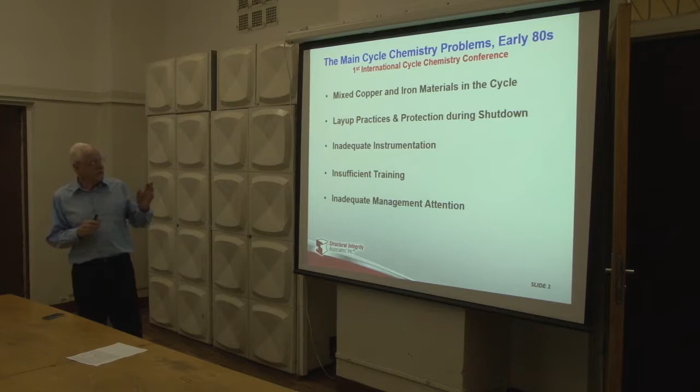If we think about the situation 30 years ago, in the early 80s, I conducted many surveys of a large number of power plants all over the world. These were the main cycle chemistry problems that existed at that time. The first one involves the use of both copper alloys and carbon steel or iron-based materials. It was very difficult to have those in the same power plant and get some success. So this was a major item.

30-something years ago, there was how we stored the equipment, how we shut the equipment down and protected it when it was shut down, and you'll see today that's still a very important aspect. The instrumentation on the power plant to identify conductivity, sodium, pH, or whatever, was also deficient. There wasn't enough training of staff, and there was inadequate management attention.

So when you go to the power plant, you're going to be a little chemist in the power plant, and there's going to be a big manager. You've got to be able to convince that big manager that chemistry is the most important thing in the plant. And I can tell you right now, it's impossible for you to do unless you have a management process in place that involves that plant manager. The plant manager is just as important as the chemist in the plant. So these were the items we found 30 years ago were the most important from a cycle chemistry point of view.

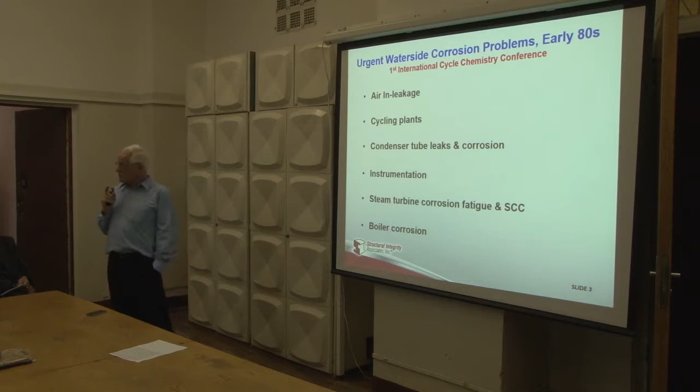And if you look at the corrosion problems that were in those power plants at the same time in the early 1980s: air in-leakage into the cycle, meaning air that comes in, not only oxygen but CO2, into the condensate part of the plant, through the condenser or the steam turbine. The plants at this time were just starting to cycle, or to be needed every day and shut down every night, so they were cycling. Condenser tube leaks and the corrosion associated with them.

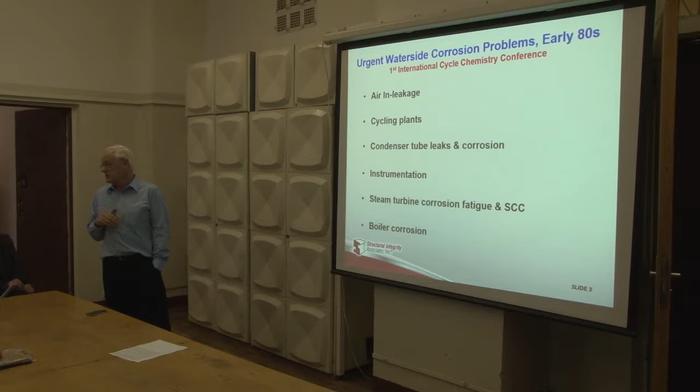Instrumentation again, a steam turbine, corrosion fatigue and stress corrosion cracking - these were the biggest problems in the steam turbine at that time. And then the various boiler corrosion mechanisms. So you can see this is where we were 30 years ago. We had to move forward from these situations to try to do the research to understand what was needed so that we could hopefully improve the reliability of the plants.

At the same time, there were many sets of guidelines in existence, and there was no international consensus. I just chose here four particular sets of guidelines, and I don't know whether you go into this in the classes you have here, but these were the four main guidelines that existed in the world 30 years ago.

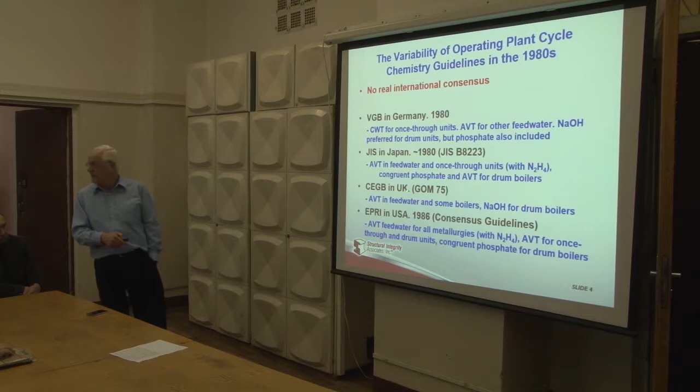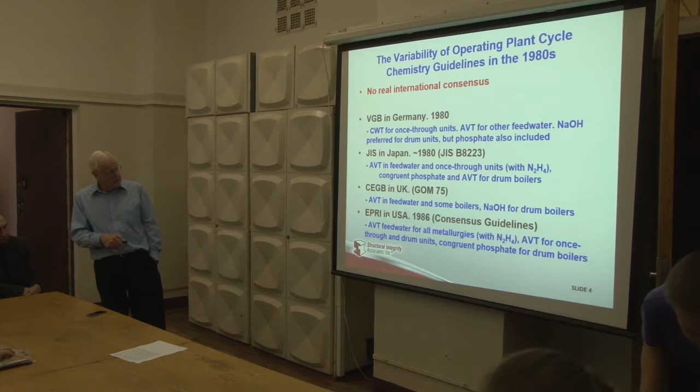This is in Germany, from an organization in Germany. This is in Japan, the Japanese standard. This is the CEGB in England - this was the largest utility, the largest number of power plants in the world at the time. And then this was EPRI in the United States.

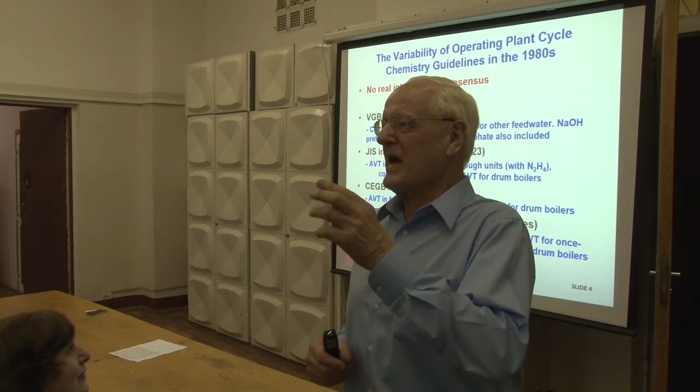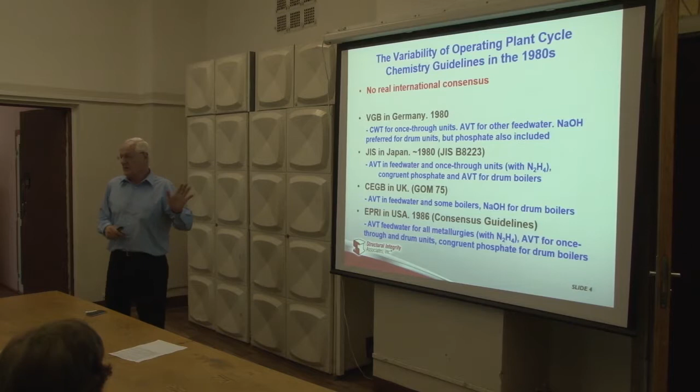In the 1980s there were four sets of guidelines, and they were all different. There was a different philosophy in each one. In Germany, they had already moved to adding oxygen to the plants for the chemistry - this is called combined water treatment, meaning you add some oxygen to the plant, and they preferred sodium hydroxide in the drums.

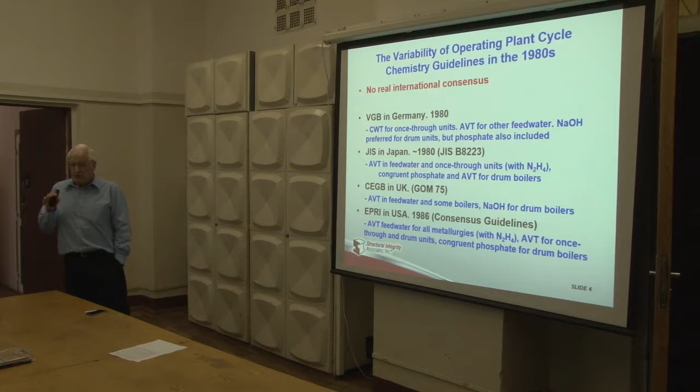In Japan, they preferred phosphate in all their drum units, and they operated all their units under reducing treatments. That means they added a reducing agent such as hydrazine or oxygen scavenger - I don't know what you call it here, but one of those.

In the CEGB in England, they operated with sodium hydroxide. And in EPRI, this was the first guideline that I developed when I was at EPRI - they had all the different units add reducing agent at this time, and no oxygen. So across these various countries, most of the world, there was no agreement, basically no agreement on what the best chemistry was, what the optimum chemistry was for these power plants.

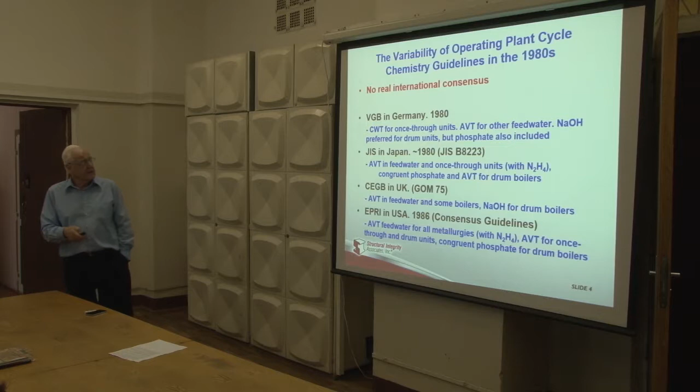So we had to move away from this situation. These were the reliability issues at the time - the use of these guidelines caused problems in the plant, failures. The number one problem in almost every plant in the world were boiler tube failures, and most of them were influenced by the chemistry. I'll show you in a minute.

Steam turbine blades and discs in the low pressure part of the plant - that was the major problem that occurred in the steam turbine. And every one of those was influenced by the chemistry. I emphasize, every one of them was influenced by the chemistry.

Condenser tubes, feed water heaters, and then flow accelerated corrosion - it was not known as flow accelerated corrosion then, it was known as erosion corrosion. At this time, in the early 80s, nobody had been killed in any of the plants because of FAC. Now, as you probably know, many people have been killed because of this mechanism, FAC, which is 100% controlled by the chemistry.

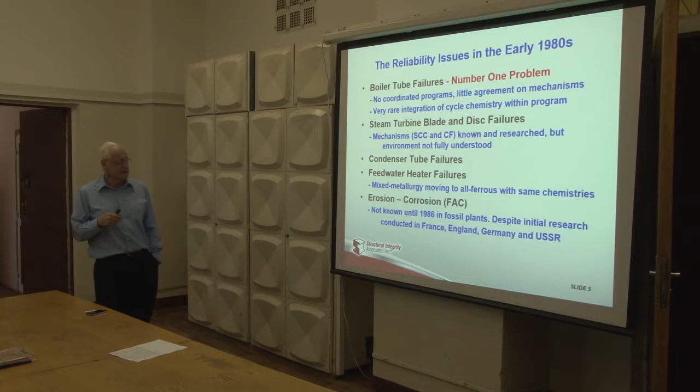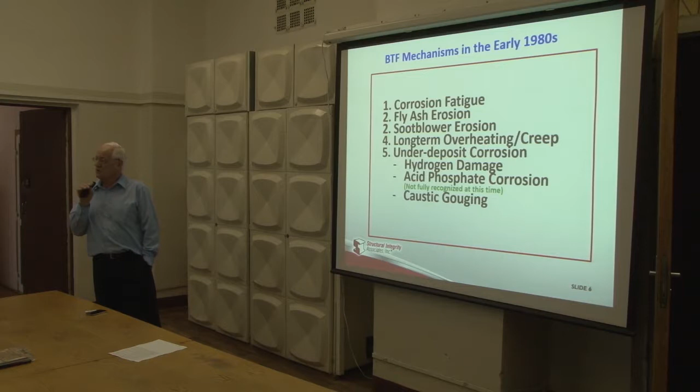So these were the reliability problems that existed, these were the tube failure mechanisms that took place. This is the ranking order of boiler tube failure mechanisms, and this one, corrosion fatigue, and all of these at number 5 here, are all influenced by the chemistry. They're all controlled by the chemistry that people like you control in the power plants.

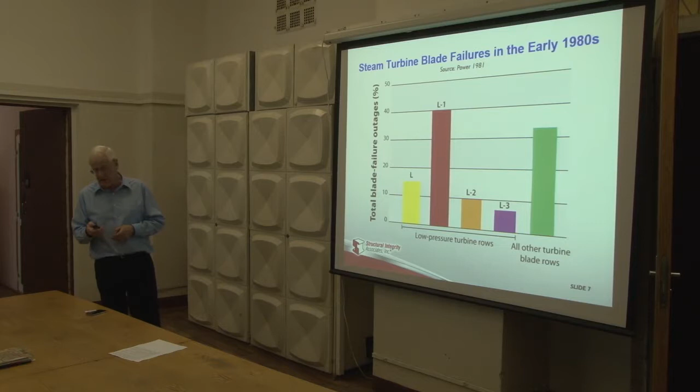I tried to illustrate to people like you at the time that all of these problems, chemistry-influenced problems, are in your hands. And we have to do something in terms of research.

So then, in the beginning of the 1980s, we started to do some research to try to understand what was going on. But we had to recognize that there was already a very large amount of research that had already been done by some very famous people in the world. Many of them came from here in Moscow. I put a little slide together here - I call these the mountains of the industry, very important people. I think many of you will recognize these names, I hope, yes?

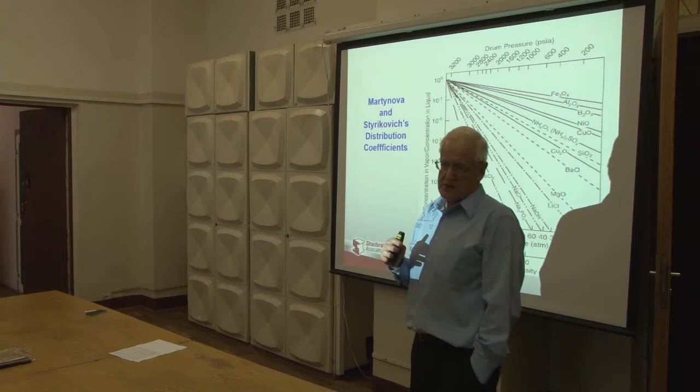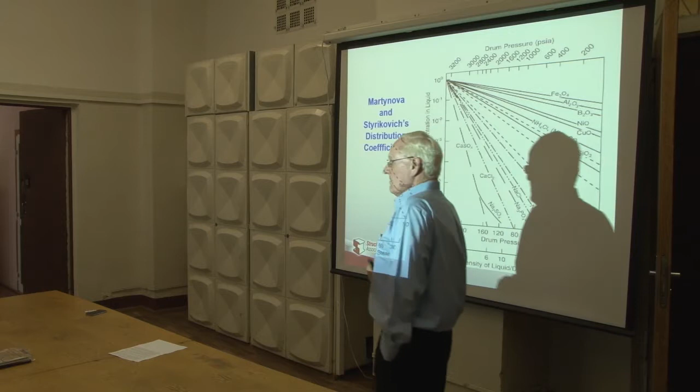This is what we call the ray diagram in English. I don't know whether you call it the same in Russian. This was developed here, just along the corridor, I think, by people who worked here. The idea was to help us understand if you have some impurities in the boiler, what goes into the steam. You can see it's plotted against pressure, and each one of these compounds were typical compounds.

This diagram was in existence for maybe 30 years until further research was done to improve it, which I'll show you a little later. But this really helped us in the 60s, 70s and 80s to start to understand how those impurities went into the steam.

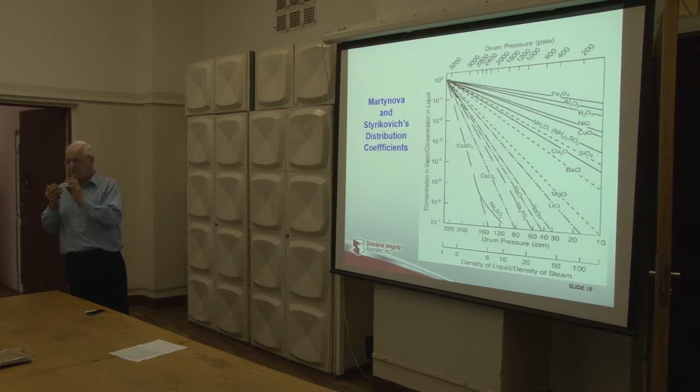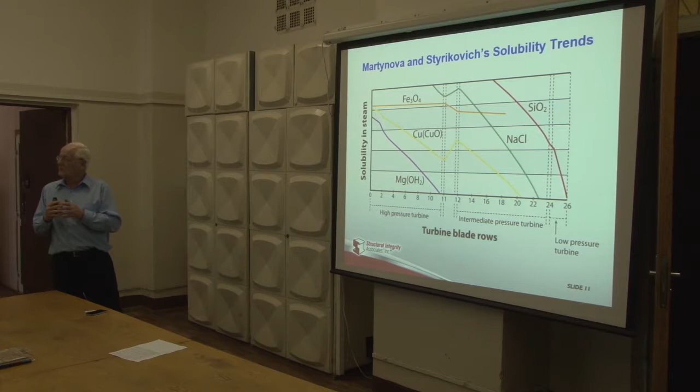And then there was also, again by the same people, work on the various compounds that deposit onto steam turbine blades. Most of you will recognize that chloride here is not a very nice compound on a steam turbine. This shows you the solubility of them, so that we could start to understand which compounds would come out on the steam turbine and could possibly be causing a problem there.

This was a major piece of work done by Bill Lindsay and Otakar Jonas to superimpose the chemistry on the thermodynamics. Many of you will recognize on the bottom here the Mollier diagram. Here's the saturation line, and this shows the expansion through the low pressure steam turbine. So the area that I showed you before, that has all the major problems, occurs just about here. There was a thought that we could superimpose the chemistry on this thermodynamics. It turns out that it wasn't quite correct, and we know that from the work done later. But this was a major piece of work done back in the 1970s and 1980s.

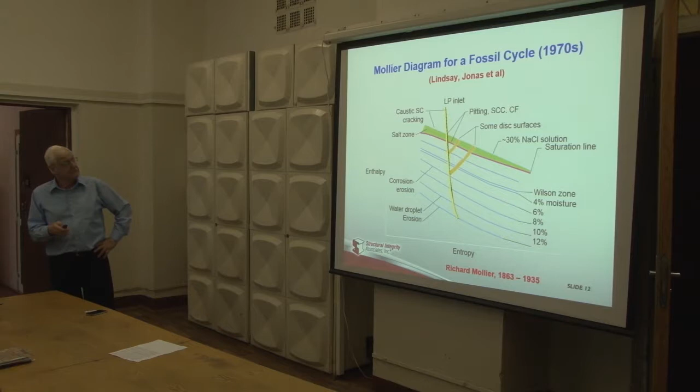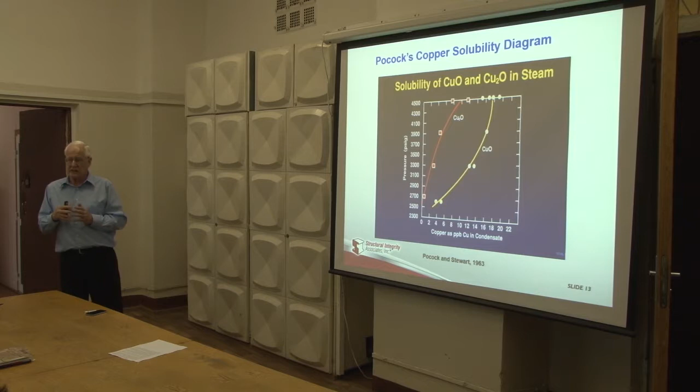This was the work done on copper to understand why you couldn't have any copper in supercritical units. There were quite a number of units around Moscow, some of the supercritical units, that had copper in them, and some of that copper ended up on the steam turbine and caused many problems. The work of Pocock in 1963 showed that as the pressure reduces, these cupric and cuprous oxides lose their solubility. So right down here, around 2400 or 2500 psi, which is about 17 megapascals, the copper can't remain in steam - it has to deposit out. This is a major understanding, and this piece of work essentially removed copper from supercritical units, establishing that you can't have copper in supercritical units in the feed water.

So by the time the 1980s came, all of this work was basically forgotten, and the use of this chemical, hydrazine, was essentially used incorrectly. And that was part of why all those failures took place, because it could not control the corrosion of the iron in the feed water part of the cycle.

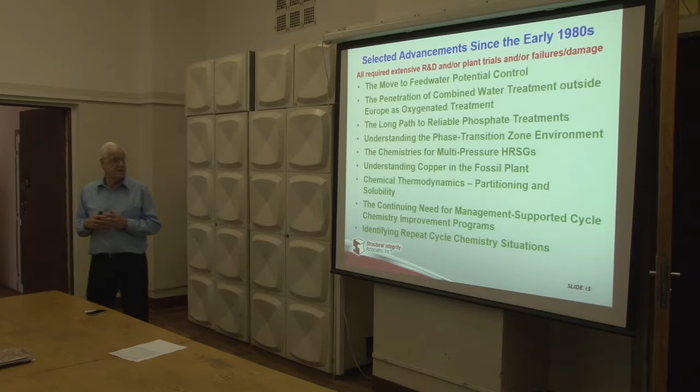So that was just a little bit of the background. Now what I want to do is just highlight a few of the items that have been dealt with from a research point of view since the 1980s. I'll go through about 4 or 5 of these just to illustrate to you. The point was that all of these required extensive R&D, meaning research was done in the laboratory, and then we applied it in the field.

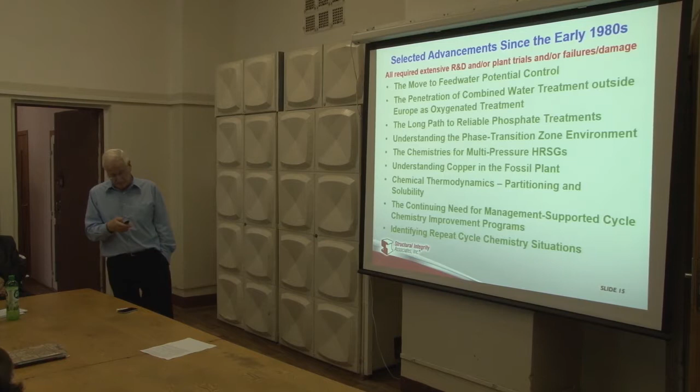So the first one was in the feed water part of the plant. In that time period, in the early 80s, in the countries I showed you - Japan, the United States, Canada, South Africa, and most of the world, with the exception of Germany and a little bit of the old Soviet Union - everybody operated with the same chemistry, the same volatile treatment, adding a reducing agent, irrespective of what the materials were. And so it became very clear that you couldn't do that.

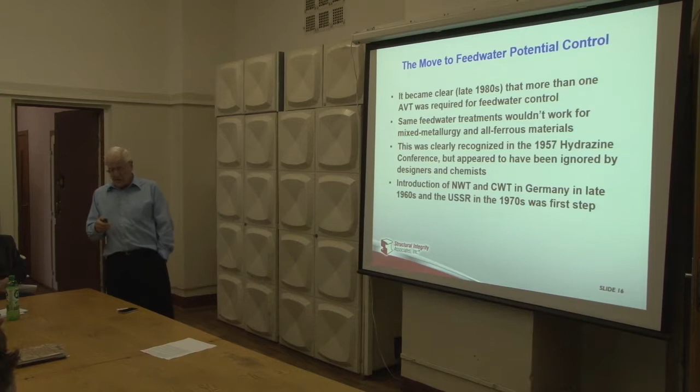So we had to introduce different chemistries, and we call them very specifically a reducing chemistry and an oxidizing chemistry. Oxidizing chemistry means you don't have a reducing agent there to make it electrochemically reducing, and you can add oxygen so that it will make it oxidizing. Then you have to know specifically which materials you can put in those different chemistries. All that was worked out in the late 1980s and early 1990s. It was started in Germany in the late 1960s by the introduction of oxygen. These two chemistries essentially add oxygen to the cycle to make them oxidizing.

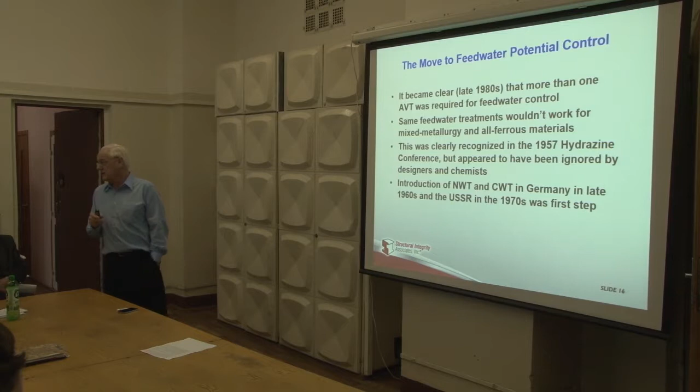And that was applied in the early 1970s, first of all in a plant close to Moscow, in the old Soviet Union. This started it, but the real application in the power plants was done actually in South Africa. This here is one of the first validations of O for oxidizing and R for reducing. I developed these names in the late 1980s and 1990s.

And they're used pretty much everywhere in the world. Anywhere you go, people know that AVT-O means there's no reducing agent, it's oxidizing treatment. And they know that if you have the R, this is a reducing treatment, and you add a reducing agent or an oxygen scavenger. There's a very big difference. It was shown here by these two people, Vinnicombe and Platt, and Barry Conlin, who at least Tamara will remember, from South Africa in 1994.

This shows the time here, and the green line is the amount of reducing agent in the cycle. When we started this, there was a high amount of reducing agent, and the iron, which is the red, was very high - you can see the iron level, 14 or 15 ppb. And as this reducing agent was removed from the cycle down to zero, you can see that the iron level follows it exactly. So this was the validation for the use of this R and O treatment.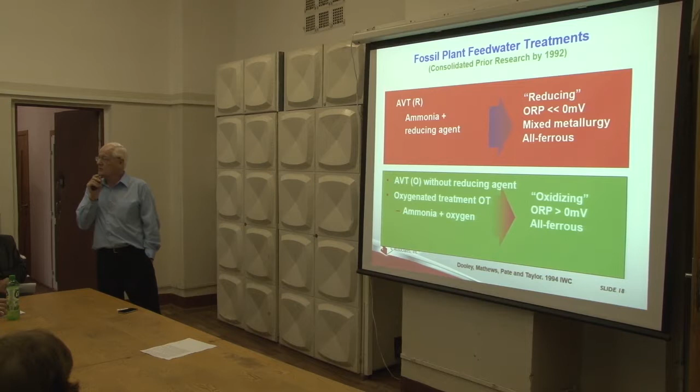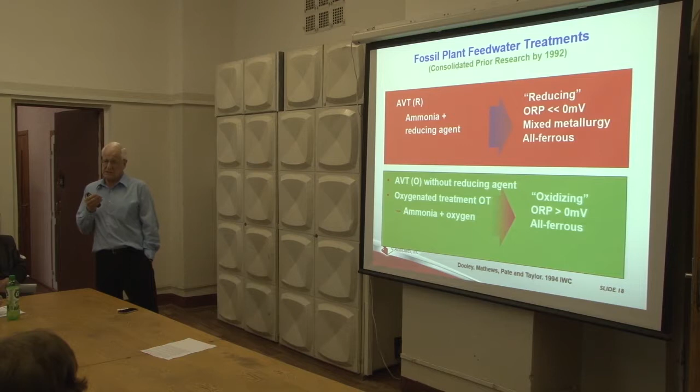These two sets of reducing and oxidizing chemistry have been one of the major steps that's been made. We still see a few mistakes around the world where people don't realize you have to adjust the chemistry for the materials that are in the cycle. We'll still have units that have copper in them operating under oxidizing conditions, or we'll have all-ferrous systems with no copper operating with a reducing agent. We still see that in quite a few places around the world, because the technology takes such a long time to penetrate into the power plants. So this is quite important.

So the next one is about phosphate, which is used in the boilers. This is the most widely used treatment in drum boilers around the world. But it's taken something like 40 years to develop a phosphate treatment that works.

This just shows you the history here. They all have very different names, and I don't know whether these are the same in Russia or not. There's coordinated phosphate, which used a sodium to phosphate molar ratio greater than 3. But when you use that ratio greater than 3, you have a high amount of free hydroxide, and that free hydroxide results in tube failures. So this one was incorrect.

So the next step was to go completely opposite, to a sodium to phosphate molar ratio of less than 3, less than 2.8 - this is called congruent phosphate, and it resulted in another failure mechanism called acid phosphate corrosion. So this one was wrong as well.

Then in the 1980s and 1990s, there were a couple of treatments, one called equilibrium phosphate and one called phosphate continuum, where the sodium phosphate molar ratio was greater than 3, but did not allow the sodium hydroxide to be too high - it was kept at 1 ppm. What happened then was we found there wasn't enough phosphate in the boiler, and it resulted in another failure mechanism called hydrogen damage.

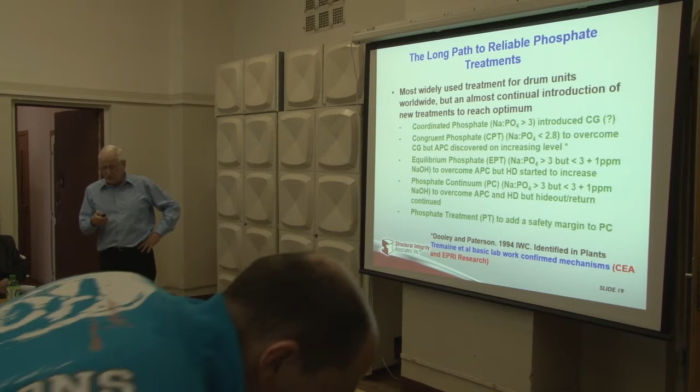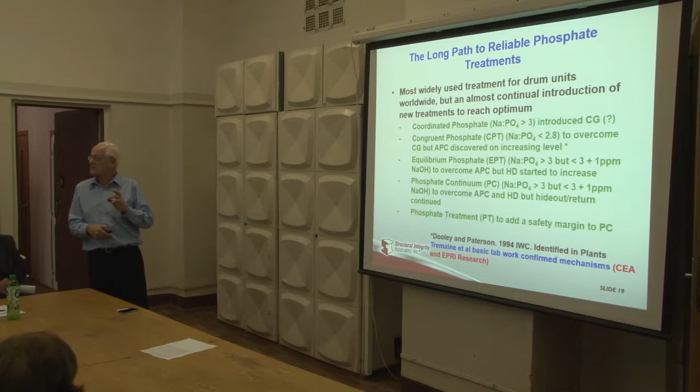Only just recently, within the last 5 or 6 years, have we developed this one, phosphate treatment, and this is the latest one that's in the IAPWS documents. It's probably easier just to see it here on a diagram like this.

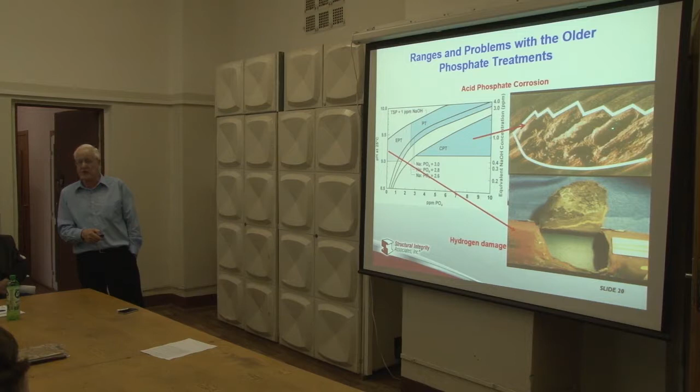So here, this is pH, this is the pH-phosphate control box, and these lines here are the molar ratio lines. This one here, as you can see, is sodium to phosphate 2.8. So if you operate below this, in this box, you end up with a failure mechanism like this. This was a very common failure mechanism in the 1990s.

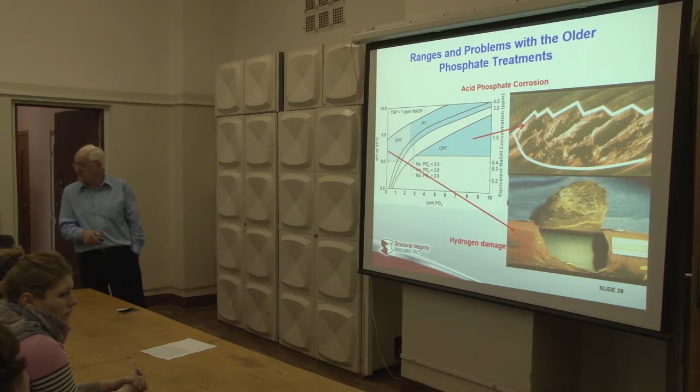Then, as I mentioned, they changed to this very low level of phosphate treatment right here in this box. Then there wasn't enough phosphate to provide protection, and it ended up with failures like this. So this was a very common failure mechanism, still is, called hydrogen damage.

Within the international community now that Tamara and Konstantin are part of, we've just developed the latest document, which we call the International Standard through IAPWS - the International Association for the Properties of Water and Steam. Russia is a member of that. And we developed this treatment here.

Again, this is pH, and this is phosphate. You can see now that it's bounded - don't operate with too low a level of phosphate here. In fact, try not to operate less than 0.3. If you operate less than 0.3, you'll end up with a failure mechanism.

Don't operate below the sodium to phosphate molar ratio line of 3. If you operate down here, you'll end up with another failure mechanism called acid phosphate corrosion. And don't operate above this line, which is trisodium phosphate plus 1 ppm of sodium hydroxide, or you'll end up with another failure mechanism. So operating with phosphate treatment requires very careful monitoring so that you operate within the right range, because if you don't, you'll end up with failure. And that's one of the things that's in your hands as the chemist, one of the basic things you need to be involved in.

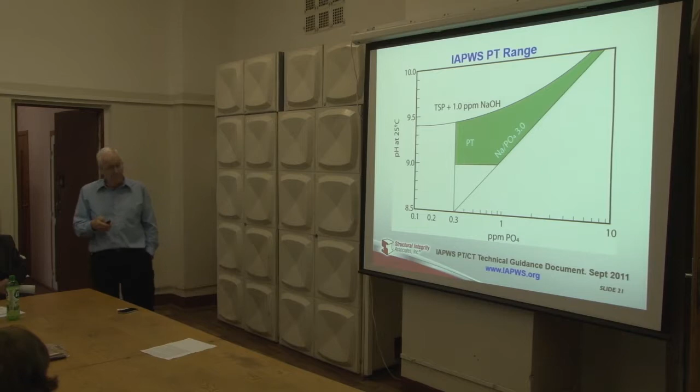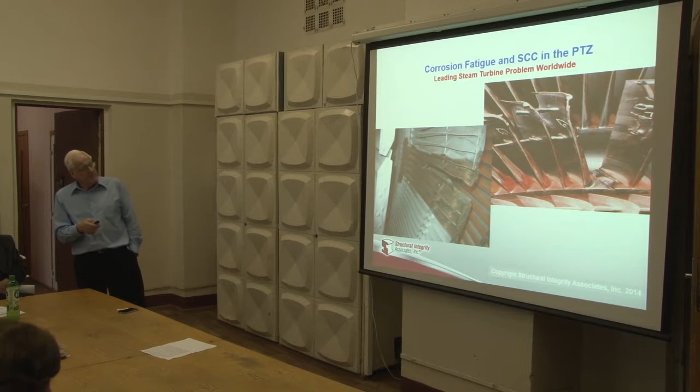So the next one is the steam turbine. These are steam turbine blades in the low pressure part of the plant. I think you recognize there should be a blade here, right? This blade has failed, and it's failed for a mechanism called corrosion fatigue. And here's another one - there should be a blade here too. This one failed because of stress corrosion cracking. And these are the largest problems in the steam turbine, and again, totally controlled by the chemistry.

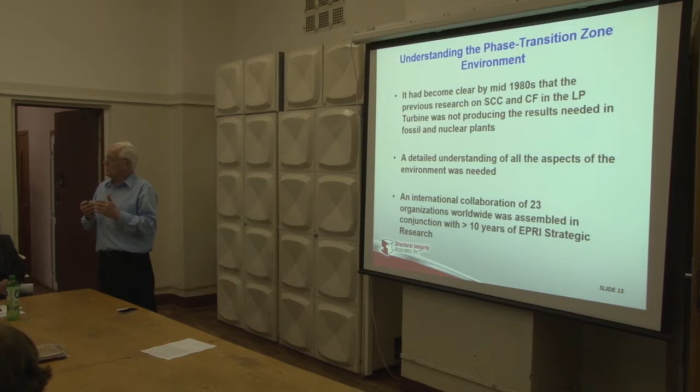First of all, as you cross the saturation line, you go from superheated steam to moist steam, and we wanted to know how that took place. Then you have the formation of liquid on the blade surface, called a liquid film, and we wanted to know the composition of that. And then we wanted to know what mechanism actually took place. The work took place over a large number of years - more than 10 years we worked on it, here in the steam turbine facility. Some of it was conducted at the Moscow Power Institute, and some in the Academy of Science in Ukraine, plus these 23 organizations around the world.

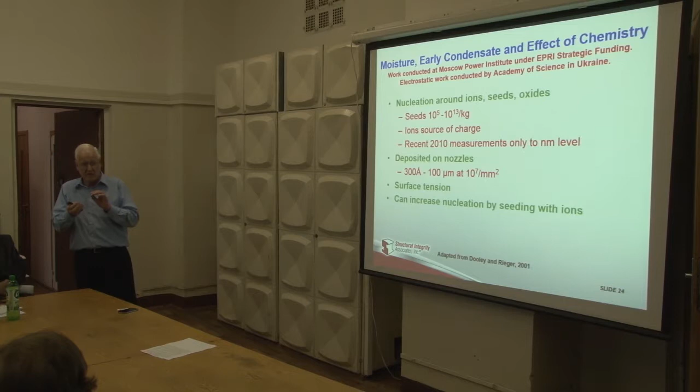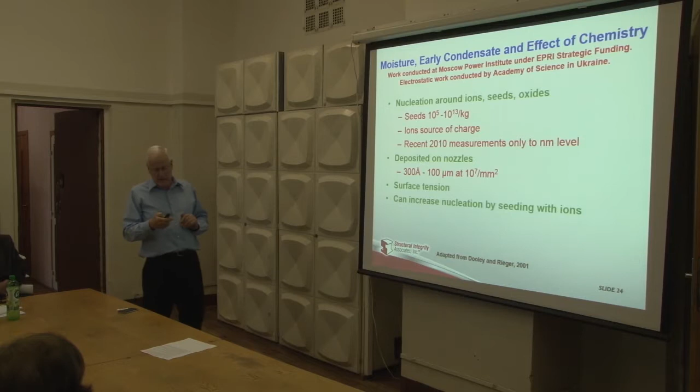The work that was done enabled us to identify how that moisture forms as it crosses the saturation point. It forms on ions in the flow, heterogeneously on those ions, and they have an increase in concentration. So if you have a small amount of chloride in the superheated steam, as it crosses the saturation line into that phase transition zone, these little droplets have quite high levels of chloride and sulfate, and they have essentially no oxygen in them. So whatever the level is in steam - very low levels, like 1 or 2 ppb of chloride and sulfate in the superheated steam - the liquid that forms is highly concentrated in chloride and sulfate.

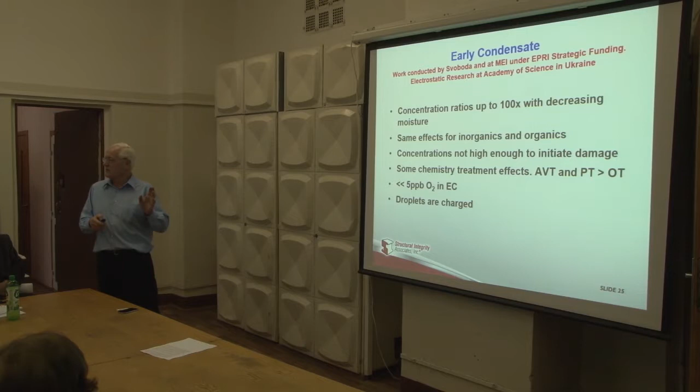We worked out what the chemistry was. And the most important thing that we identified or confirmed was that in these little droplets and in the liquid that forms in the steam turbine low pressure part, there's no oxygen - basically none at all. That was really important because all the previous experimental work had been done in saturated solutions of oxygen. So that's why the previous research was not correct - it had been done in the wrong environments. When you start to do it in the right environment that we've actually measured, then you can understand exactly what happens.

The liquid films that form on the blade surfaces are the drivers for those failure mechanisms, and we needed to measure those. So my good friend, Professor Povarov, who ran the steam turbine group here, designed some very special equipment to measure that liquid film on the blade. We could extract the liquid films on the blade and measure their composition, and again we found there was no oxygen in them, and they had a concentration factor.

And so now, after 10 years of research, we knew pretty much everything that was taking place in the steam turbine, in the low pressure segment. And so then we could go on and work on the mechanisms themselves.

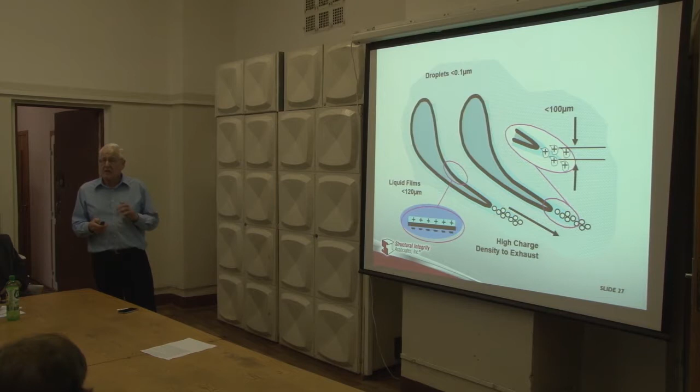So we basically knew everything about what was happening in this area of the turbine. And so then we could go on and work out what the mechanism was. And this is where there was an absolute major breakthrough that took place. And it was published here, originally in 1999, but it was published at the meeting in Tokyo in 2004.

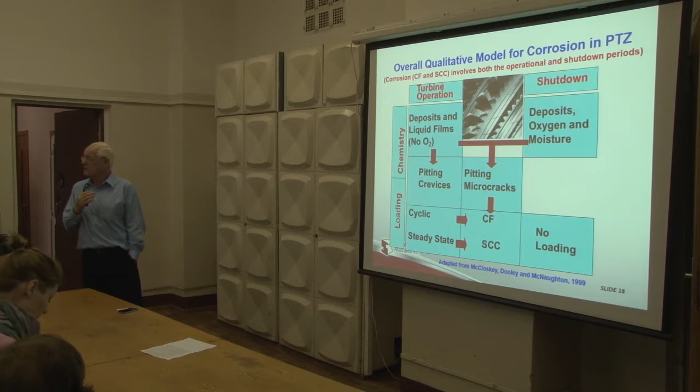And the major step was this: the failure mechanisms that take place in the steam turbine are controlled by what happens when the unit is shut down, when no protection is provided to the steam turbine. And that's the thing that initiates the pits on the blade surfaces. If you don't provide protection during the shutdown, you end up with pits on the surface, and then those pits can grow in the liquid films that I just showed you.

So then you know pretty much everything about it. But the turbine operates obviously, and it rotates, but it's also shut down. And so it was this part over here that was actually causing these blades to fail. The shutdown part of not providing any shutdown protection.

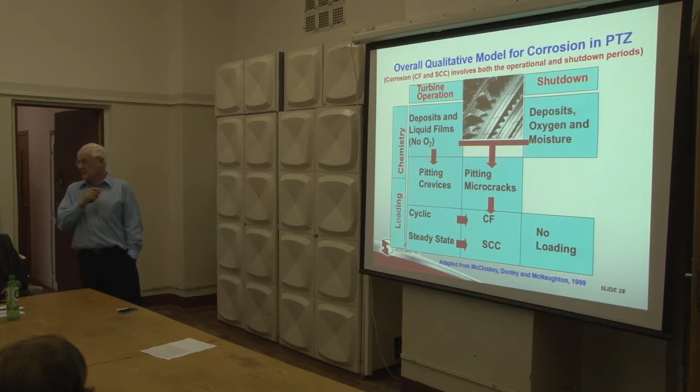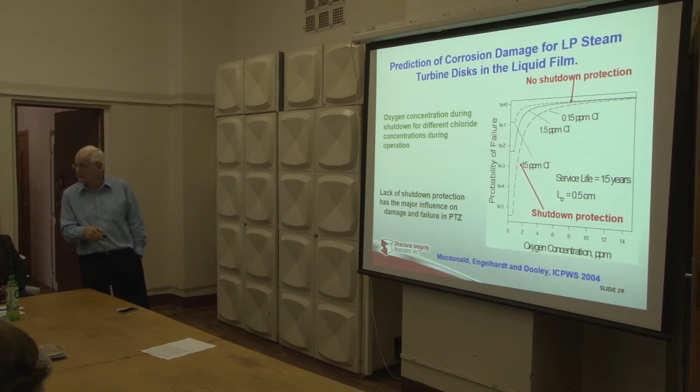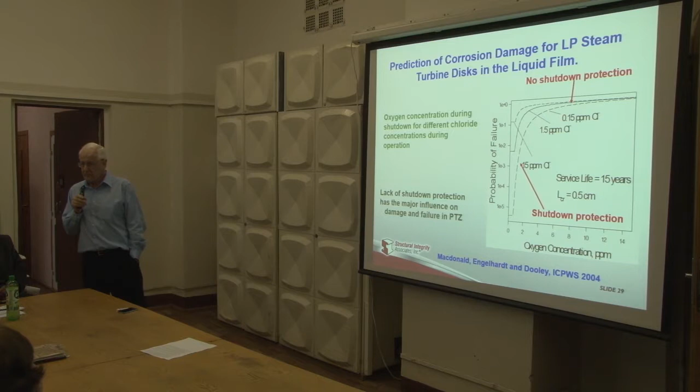And so you can see that as you come down here and you reduce the amount of oxygen that's in that liquid film during the shutdown, then you reduce the probability of failure. And it's an enormous amount. It's like more than 3 orders of magnitude that you've changed the risk of having damage in the steam turbine, just by providing protection during the shutdown period.

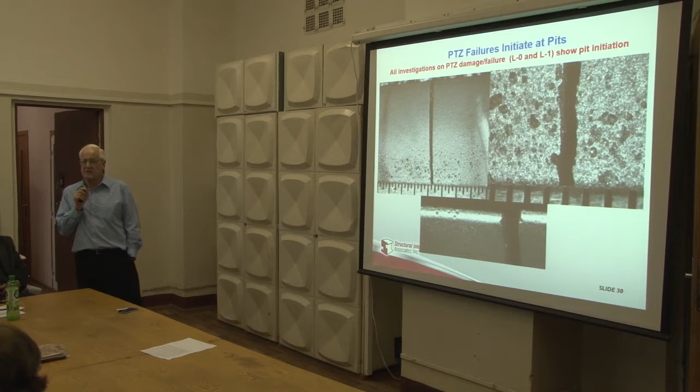So, now the HRSGs, we're going to talk about those tomorrow with a different group, but these are from the combined cycle plants. And originally, it was thought that these were very simple plants, that we could just apply the same chemistries that we have in the conventional fossil plants. It turned out that you can't do that. You have to look at the plant as an absolute whole.

So again, I don't know whether you do anything with. Do they do anything with combined cycle plants tomorrow? No. Okay, so I won't spend too much time on this.

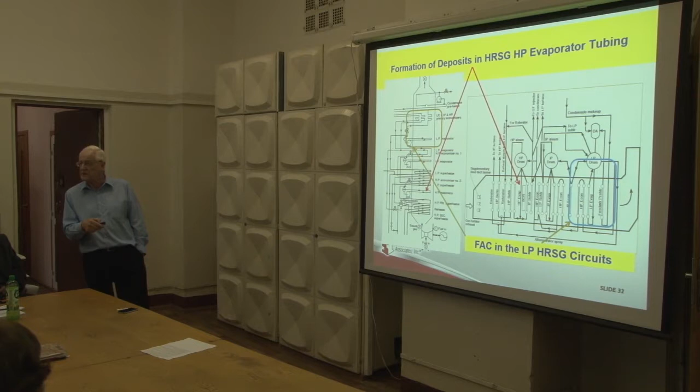Or there's a vertical system where there's a gas turbine here, and the exhaust from the gas turbine flows over these different surfaces. And I'll move on here.

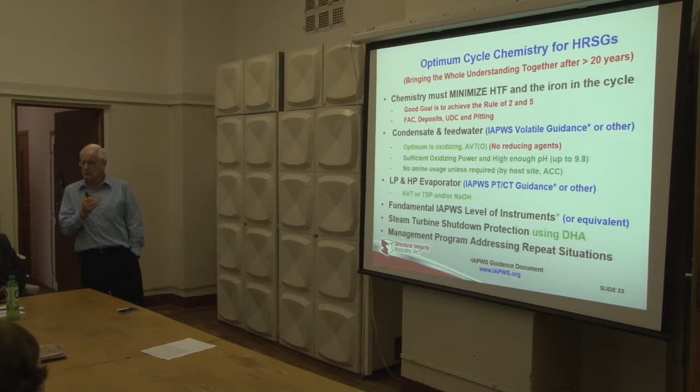So we know now through the IAPWS organization what the optimum chemistry should be for these plants. So we missed this one, and come to this one on copper.

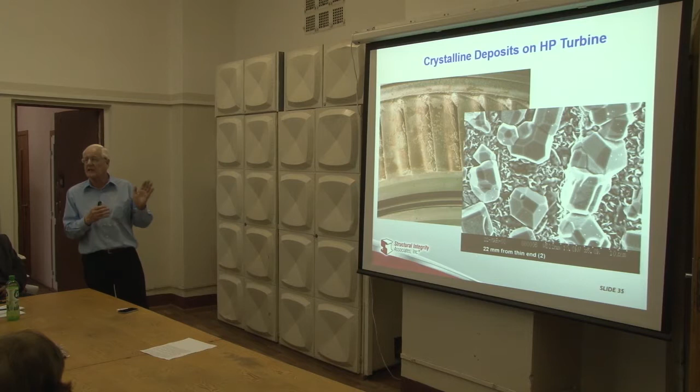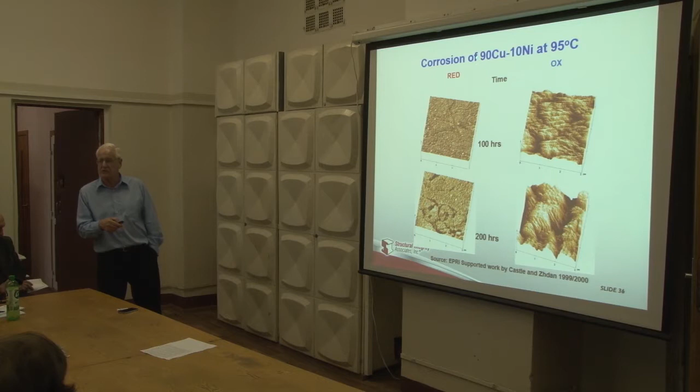And so this just validates again that if you have any copper in the cycle, you've got to operate under reducing conditions. Feed water has to be reduced. So I'll move on here.

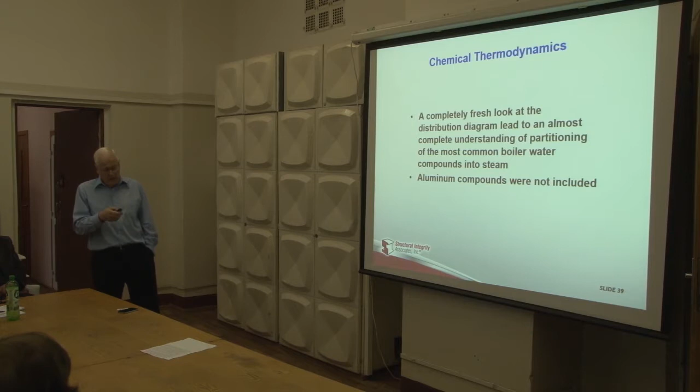So the last part I want to look at is just to come full circle now. I showed you before the ray diagram that Martynova developed, but what we found when we actually measured the composition in steam, we found that it didn't agree exactly, and it needed another piece of research to put it all together, and we essentially developed this.

This was done at Oak Ridge National Laboratory. It was done as an international collaboration again, and 10 countries supported it, and you can see now all the different compounds right here that exist in the boiler and how they partition into the steam.

And we needed to know this because this is what protects the steam turbine from high levels of contaminant in the steam. And again, this was a major step forward, a major iteration on the ray diagram, because it now allowed us to be able to identify what the compounds were that went into the steam.

It was thought previously that if you had chloride in the boiler, that the chloride would go into the steam as sodium chloride or ammonium chloride. But in fact, it doesn't. It goes into steam, as you can see here, as HCl.

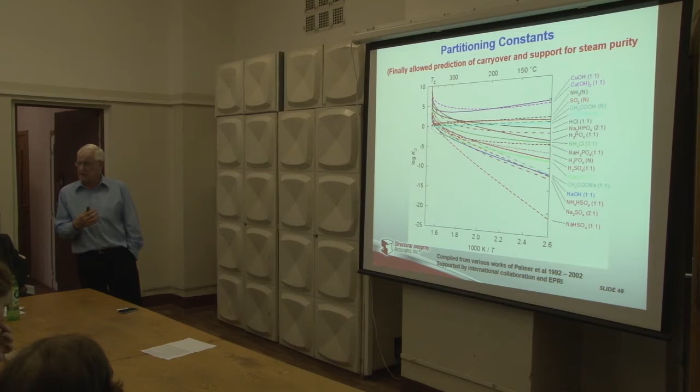So the higher up you are on this diagram, the more likely it is to go into the steam. And so you can see down here that sodium chloride is much lower - I can't see it actually - but chloride and sulfate are much lower than the HCl and the SO2 as they go into the steam. So we were able to identify how these compounds actually get into the steam and exactly what they are.

So that was 5 or 6 very quick items. Now I want to come to you - see if you've been paying attention.

And so many of the uncertainties identified in the 1980s have been looked at, have been consolidated, research has been done, and we now have very good understanding of nearly all of those items that I mentioned, and all of those problems that existed in the 1980s.

We now have much better and closer international agreement on how power plants should operate. And this is basically because the IAPWS organization has put out a set of guidelines, which is basically the international standard. And the other organizations in the world now are essentially using those same standards and changing their guidance.

So we're hoping that all the plants in Russia, for instance, will use the IAPWS guidelines, as they do in Germany and in the US and in Japan. And we're trying to get all the manufacturers in the world of boilers and turbines and HRSGs to use these IAPWS standards based on all this research that's been done, so that we have some conformity, so that we won't have the problems in the future. That's our aim or our goal, but our aim and our goal doesn't always happen, okay, as you know.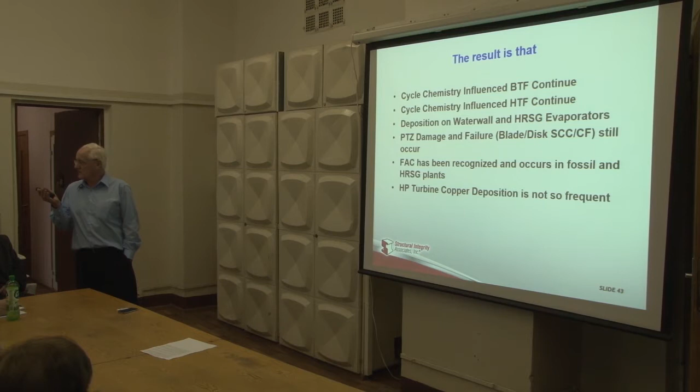We looked and looked and looked for many years to try to find why that is. And this is what I already told you at the beginning, right? It comes down to the basics.

We call these basics in power plant chemistry repeat cycle chemistry situations. That means something happens in the power plant every day, or every week, or every month, and it's not correct. The basics that you're supposed to be applying to the plant are not applied properly.

And how do we know that? Because I did analysis of over 200 failures in power plants all over the world, and what we found was that every one of those failures can be related back to multiples of these repeat situations. So all cycle chemistry influenced failures and damage that I've shown you can always be related back to multiples of these repeat situations.

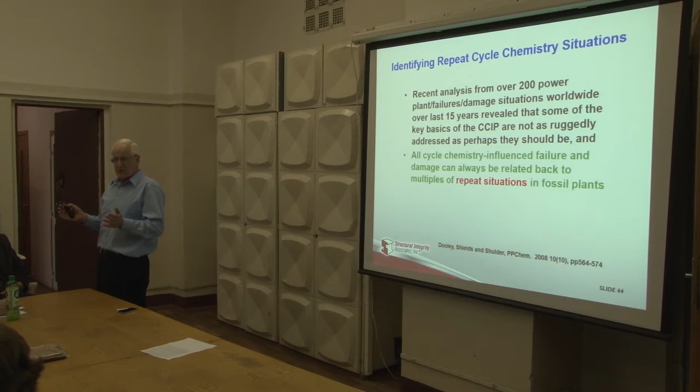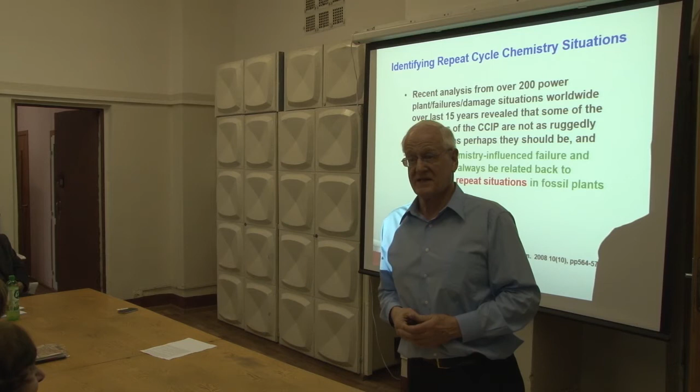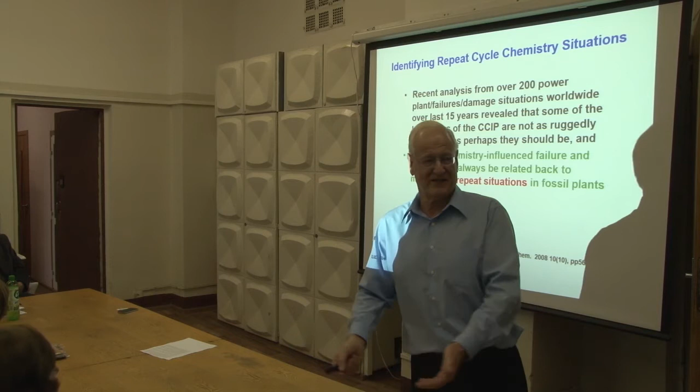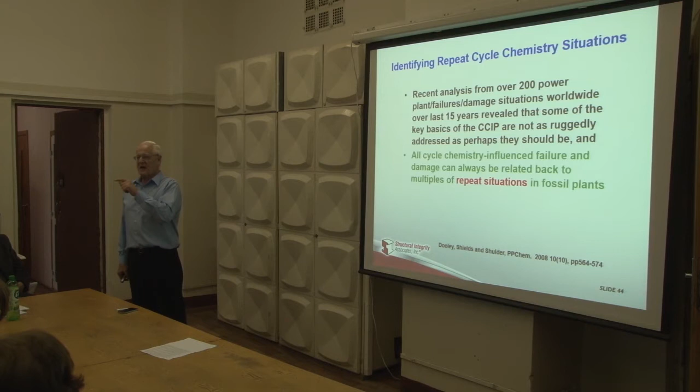So now the question's for you: tell me what a repeat situation is. What do you think a repeat situation is, in the basic things that chemists do in the power plant? Who's got an idea? You don't need to be quiet. Yes, go ahead, have you got an answer? No? Second row? No? Yes? Have a guess, have a guess. What's a basic thing that a chemist does, that you must be taught every day by a professor here? Right? Anybody? What about on the front row here? You've had a good view, all you girls. No? Nobody got a guess. So what happens when you go to the power plant? How do you know that you're going to do the right things? When you go to the power plant, I want you to be doing these basic things every day so that you don't have the problems. Any ideas? No ideas? On the back row? No? Okay.

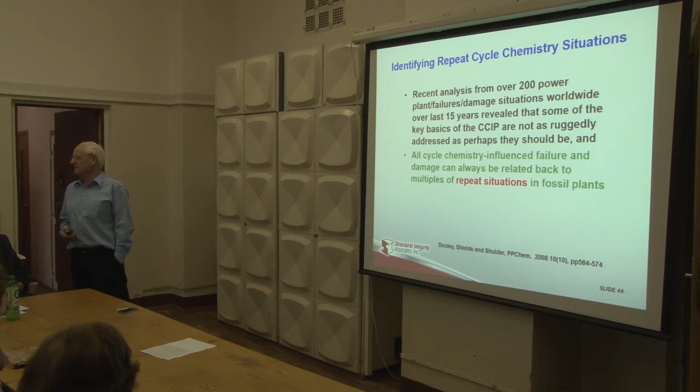I better show you, haven't I? Should I show you? Yes, I'll show you. So these are the 10, these are the 10 basic features of a power plant chemist's job that are not being done.

Do you think you might need to know what the level of corrosion products is? You need some indicator to tell you whether the chemistry on your plant is optimized or not. How do you do that? You measure the amount of iron in the cycle. Many plants that we go to do not measure the amount of iron in the cycle, so they don't know what the corrosion potential is. They don't do it every day, so it's a repeat situation. It could be too high - there's a guideline for it, it could be greater than 2 ppb every day, so that's a repeat situation. That's something you need to know every day as a power plant chemist.

Second one: what about where this iron goes to? It deposits in the high heat transfer areas, in the water walls and in the evaporators of HRSGs. Again, if you don't know what that is, then you don't know whether you can have failure. Failure is always preceded by deposition on the water wall. So every day you don't know it, it's a repeat situation. It's a basic thing you need to know as a power plant chemist. And here at Moscow Power Institute, you should know it because we did some of the basic work just along the corridor here to measure deposition. Right, Tamara? Yes, we did it just along the corridor, we measured it.

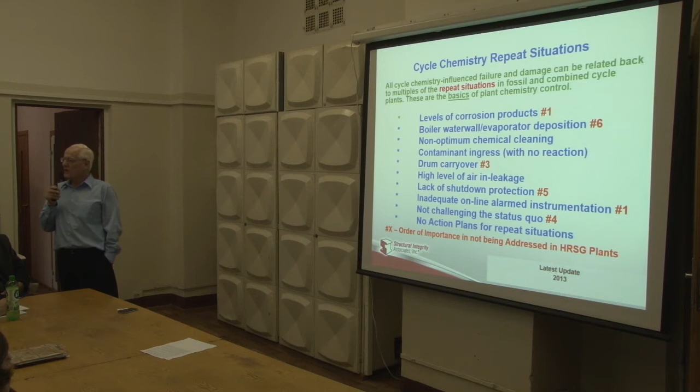And what about chemical cleaning? If you don't do the chemical cleaning properly and you leave some deposit in the boiler, it's worse than it was before. It's a repeat situation. What about contaminant ingress - allowing chloride or sulfate to come in from a condenser leak and not doing anything about it, particularly if it exceeds a shutdown limit on a boiler? And what about measuring how much goes from the boiler into the steam?

Where does the chloride come from that goes into the steam turbine? It doesn't just suddenly appear, it comes from the boiler. So you need to know what that carryover is, and you need to measure it.

What about air in leakage? High levels of air in leakage, especially on units that have copper, will give rise to the copper problems that I indicate. You need to know what that air in leakage is.

What about shutdown protection? I already showed you that the basic reason steam turbines fail is because they don't have any shutdown protection. Every day you shut the unit down without shutdown protection, it's on the path to failure.

Inadequate online instrumentation. Not having sufficient instrumentation to know how your power plant works. This is one of the biggest problems in a power plant for people like you, because they can't justify putting in a new instrument, a new cation conductivity meter, a new sodium analyzer, or whatever.

And this is the one that I like: not challenging the status quo. You wouldn't believe how many power plants I go to everywhere in the world, and I say, 'Valeri, why are you operating with this chemistry?' And they'll say, 'Because I always operated like that.' And they've been operating like that for 20 years. That's a repeat situation, okay?

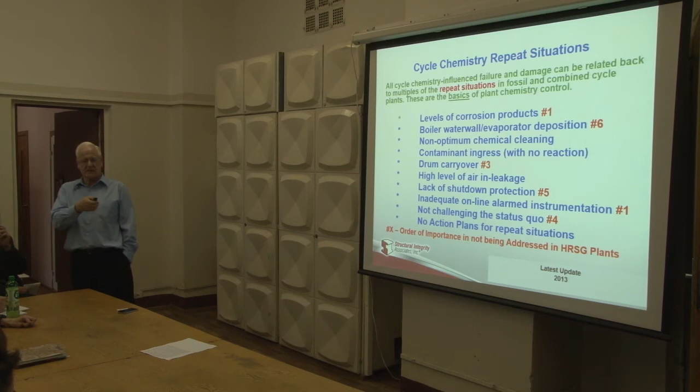So I call these the basics of power plant chemistry. I hope Professor Tamara Petrova tells you the same thing, because this is one of the key messages that a power chemistry student like yourself has to know when you go to the power plant. Many things happen in a power plant, and you have to do many other things as a chemist, but don't forget the basics. You have to remember the basics. These are absolutely the basics of chemistry.

And these numbers here, number one, these are the most common: not measuring the corrosion products, not having the right instrumentation, okay? Not measuring the drum carryover, not measuring what goes into the steam. So please, when you finish here and graduate as super chemists from NIU, super chemists I emphasize, remember the basics that you learned here.

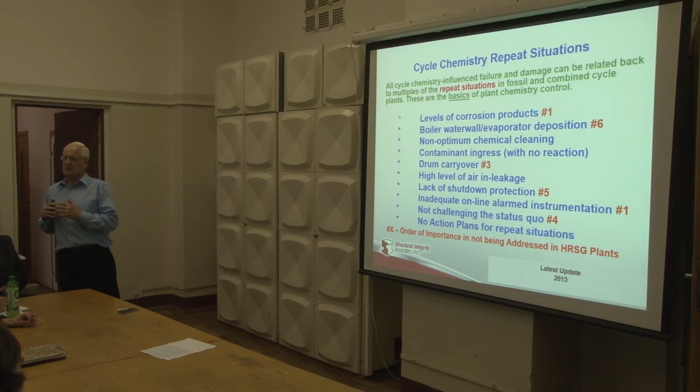You know, key message: you won't believe how many plants I go to that don't do these things. These are the plants that have failures, and you need to do something about it.

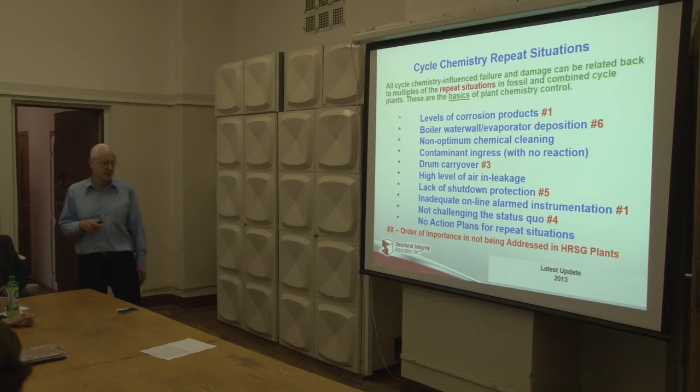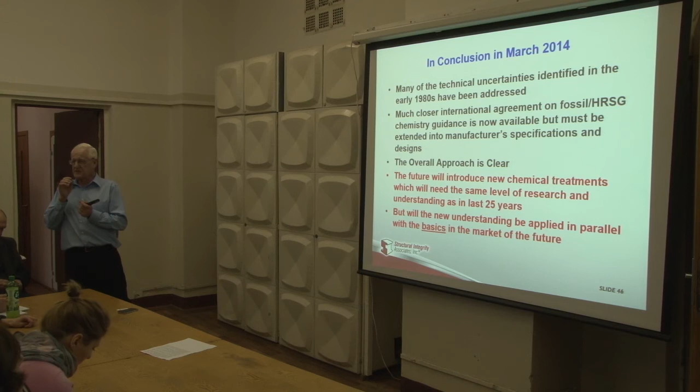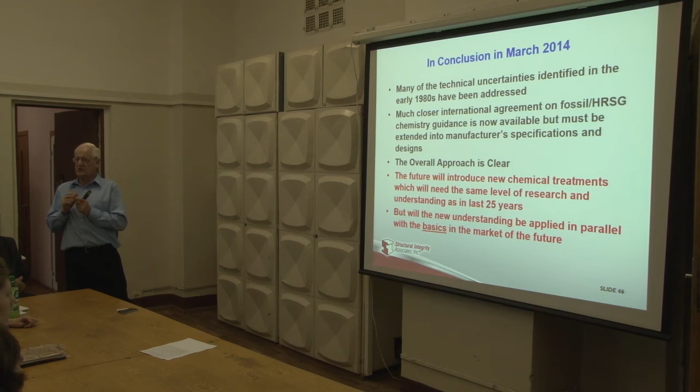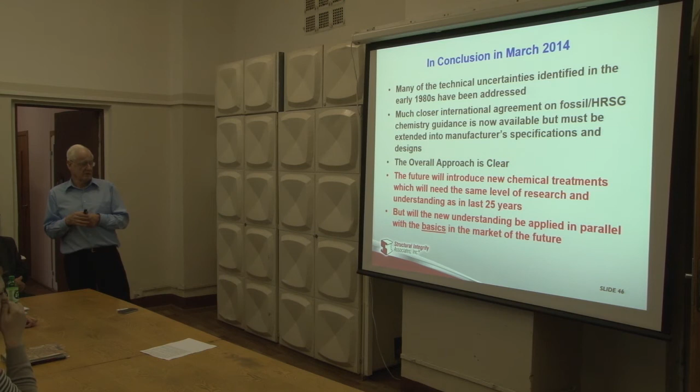So in conclusion, I think that as we move forward, I anticipate there'll be new chemistries added, and you'll get a salesman knocking at your plant door saying, 'This is the best chemistry that you've ever had.' Make sure you understand what it is. Make sure that you know what it's going to do to your plant. Make sure that you do those basics of power plant chemistry, because if you don't have any indicators, you won't know if this new chemistry is good or bad. Okay? And I think that's everything.

Okay, Constantine, I think that's about all I have to say. If anybody has any questions or comments, I'm more than willing to answer them.